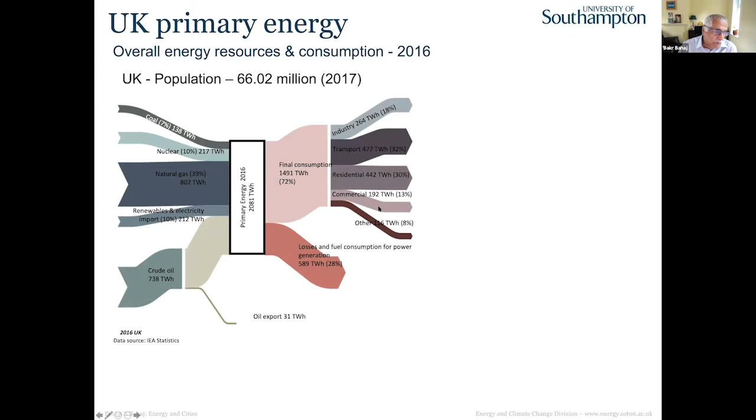So looking at the UK as a whole in terms of primary energy, this is the chart that people show. This is for 2016; I have not updated it. It indicates where the inputs are and where the outputs are. You can see the final consumption, and this is how much we waste, about 28%, and this is the input from renewables. And if you look at what's happening to the grid now, this is the 24th of May. You can see that the top producer of electricity in May is wind energy. And in selective areas, even solar is producing a lot of electricity for us.

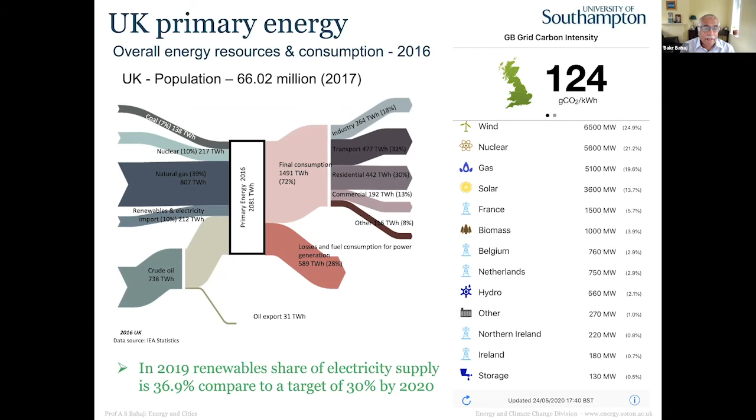And you can see by 2019, about 37% of our electricity was produced from renewables, really beating the target of 30% by 2020. So we're doing quite a lot in relation to energy generation and making it through renewables. But we're not doing very much in relation to buildings.

So in terms of international targets, this is what the Climate Change Act did in 2008, far beyond anybody now thinking about the Paris Agreement. 2008, a long time ago: 80% reduction from 1990 by 2050. And I'll talk about how this is going to be achieved. This is the Climate Change Committee, and these are done in terms of carbon budgets. You can see that in the last carbon budget, agreed in 2016, emissions will be reduced by 57%. So this is really what's happening in relation to the Climate Change Act. And then we got the Paris Accord, which I'll possibly talk about in a minute.

So what does that mean? It means that by 2030, we need about 150 terawatt hours of electricity coming from low carbon. The government indicates this will come from about 50 gigawatts, basically from wind, solar PV, and perhaps marine energy, which I'm also an active researcher in. So if you put on top of that the Paris Accord, 1.5 degrees centigrade, there are huge things to be achieved in the next 30 years.

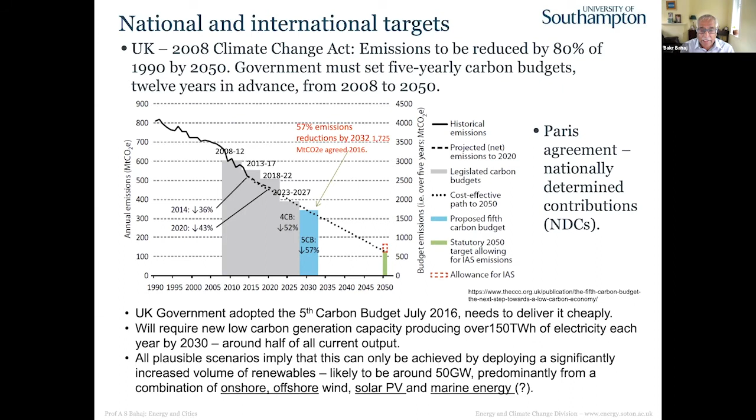So in 2019 we also changed the whole game for everybody else around the world. The UK is the first of the G7 nations to actually say we're going to be net zero by 2050. And that has a lot of implications for how we live, how we communicate, and how we travel. It means that this curve here, rather than 80%, will go to about zero.

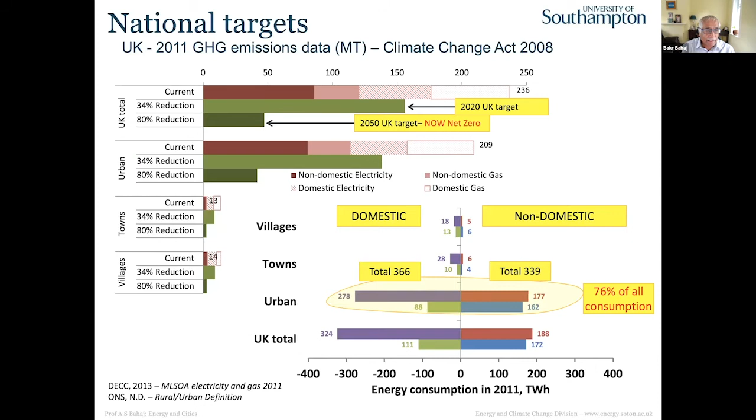So here are the targets again, basically net zero by 2050. So where is the consumption? This is the work that we've done in relation to where consumptions are around in the UK. If you're looking at both domestic and non-domestic buildings, cities rather, you can see that about 76% of that consumption is falling in the urban environment. And this is where we really need to get the action happening. And that's why we have the NetZero Collective taking that as a torch to go ahead with it.

So cities and energy are really quite interlinked. Cities are occupying a very small amount of the land surface in the world, about 2%, but they account for half the population, which will be about 60% by 2050. Two thirds of the energy, or more in fact, is consumed in cities, and 76% of the emissions is done in cities. So cities are really critical in delivery of our targets.

Also, cities are important because they can provide leadership at the national, regional and international levels to allow us to achieve the targets. And then there is also the wealth within those cities, the innovations through universities and colleges and so forth. And also there is large-scale infrastructure, for example buildings, where you could deploy systems at scale. So that's really the pinning point for why I think we need to look at buildings and also cities.

So based on that, we have done a lot of work in relation to our buildings. If you look at a building, this is a typical semi-detached or detached building. You can have a lot of aspects of how you can provide energy for it. You can have a wind turbine if the resource is high, you can have PV, you can have ground source or air source heat pumps. And this was done 13 years ago, so we've done all the work around this.

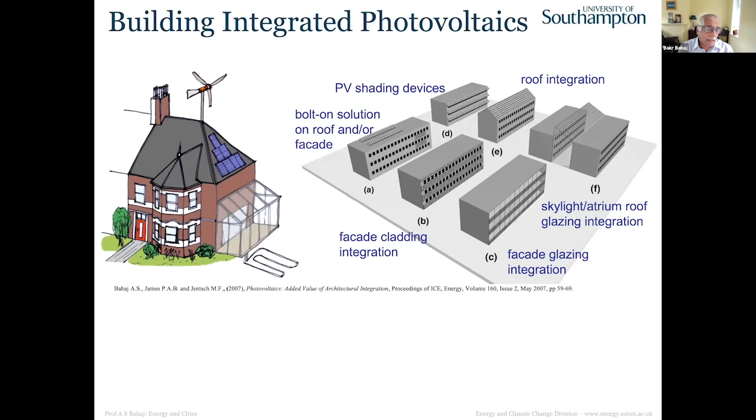And also for larger scale buildings, you can integrate photovoltaics either on the roof or as bolt-on systems, in skylights or atria and so forth. This is something photovoltaics can afford to do because they're modular and can be integrated in facades of buildings. That's only for power generation, but you can think about heat as well, not from PV but from other technologies. And these are examples of the buildings that we have in Southampton.

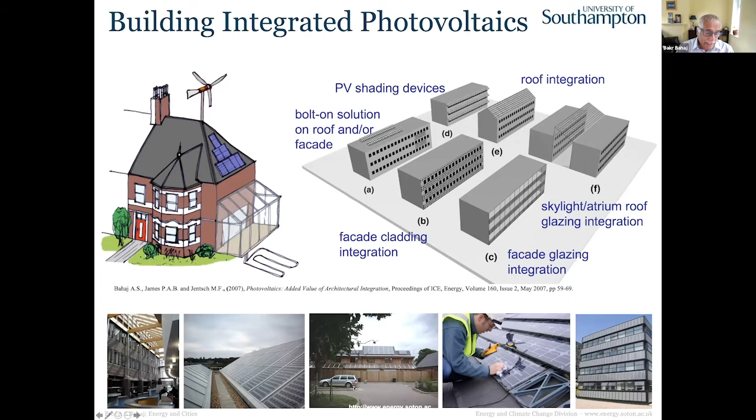So if you happen to be in Southampton, please have a look around our buildings. This is something that we have delivered, piloted and produced as a tile in here. But this building here, I will talk about right at the end. So what we have done is we mapped all the buildings in Southampton, both industrial and domestic, looking at the orientation and the areas of the roofs, to understand how much power we can produce from these buildings.

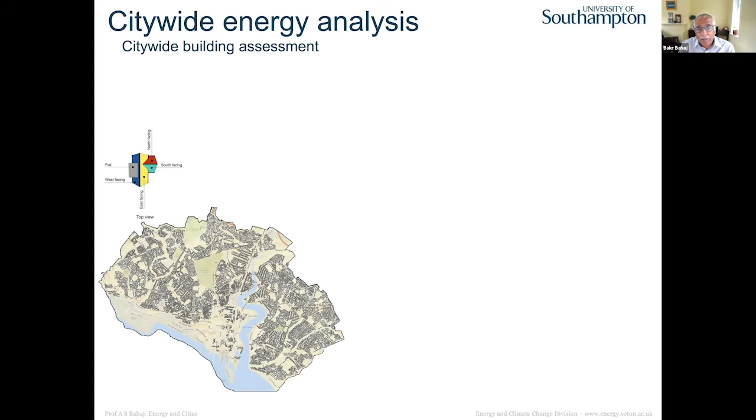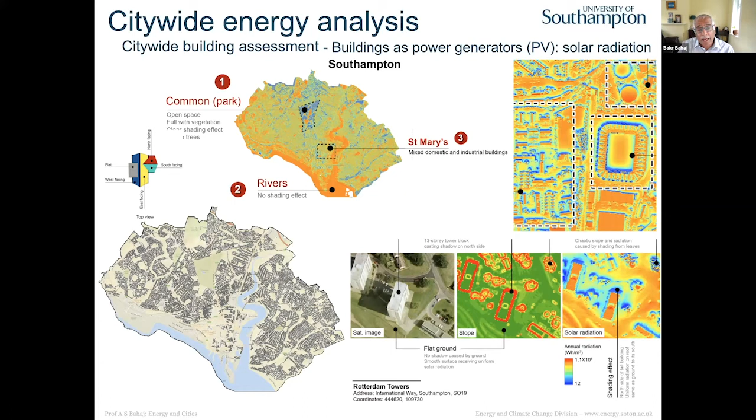So what did that tell us in terms of having electricity in cities at scale? Here are the results. As you know, buildings have smaller roofs and larger roofs, so we have to quantify the sizes of the roofs. For example, smaller buildings will have smaller scale PV, 3 kilowatts or less, and the domestic are the majority, non-domestic the minority. At the large scale, it's the non-domestic, where you have quite a lot of available area to do PV.

What's interesting is how much energy that is producing. The modeling says that Southampton will give you about 260 megawatts of PV available for the whole year, of course not continuously, but varying with the sunlight. And the amount of energy this could produce is about 247 gigawatt hours. So when I did the presentation for the council, I showed them that you can actually have about 25% over the year coming out from the roofs of buildings.

And they really got interested in this, and they tried to have a program on that. And actually they are still progressing with it, but at a larger scale. So you can see cities can actually deliver some aspect of the power requirement through photovoltaics to start with. Obviously it is varying over the day and over the year.

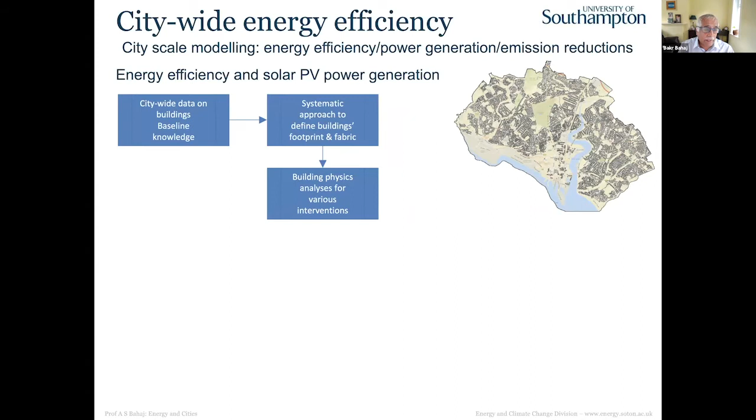And then if you have already defined the buildings in the city, you can do other stuff with it. You can do, for example, interventions like roof insulation, floor insulation, window upgrade, wall insulation, and so forth. And you can do the analysis, which is validated, to allow you to indicate how much the hard interventions can give you in terms of energy saving and emissions. So this is technology; hard interventions give you that.

You can look also at well-being, behavior, attitudes, and acceptability, also cost, economics, and that gives you an indication of what the soft measures could also produce in terms of reduction in emissions from the city. And also you can have an implemented environmental policy or a driver. For example, Southampton City now got the Green City Charter, which we are working on with them, and that will give you another indication of what the policy implications could produce for you. So that gives you an indication from a whole city, but based on a square meter of a building, to allow you to do the modeling and come up with some results.

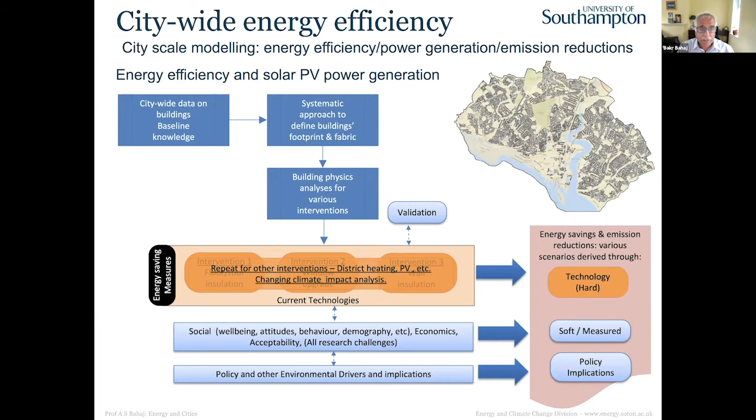A couple of minutes, please.

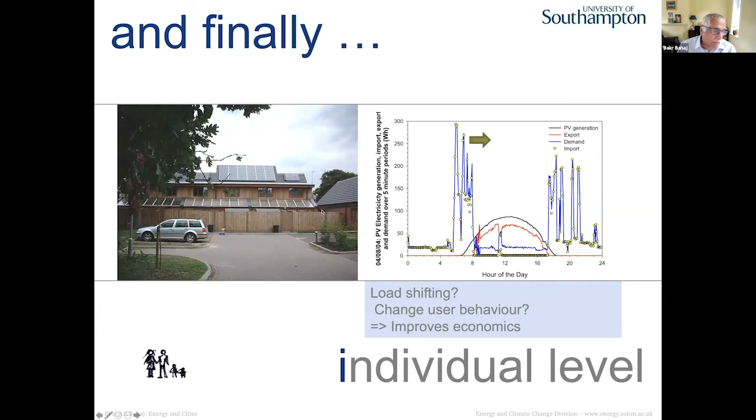So here is what the photovoltaics produce in terms of electricity. And this is what we export to the grid. You can see most of it is exported to the grid, where the consumption profile is here. So if we shift that consumption profile into the middle by behavior change, you can see that this householder could reduce quite a lot of their energy.

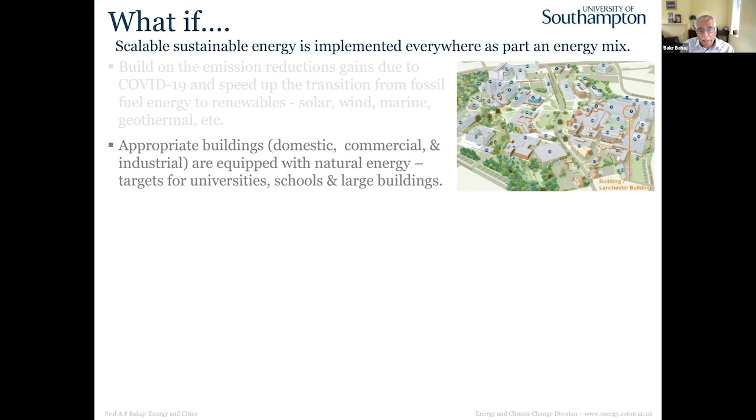So I'll finish by asking a few questions. So what if scalable, sustainable energy systems are implemented everywhere and become part of the energy mix in cities? So we can build on the COVID-19 reductions and so forth by transitioning ourselves from fossil fuels to renewables. And if you look at our campus here, we're looking at that now in real terms. How can we reduce the footprint of the university? So we're looking at each and every building. We can look at that in terms of integrated PV as well as district heating and so forth around universities, schools and citywide.

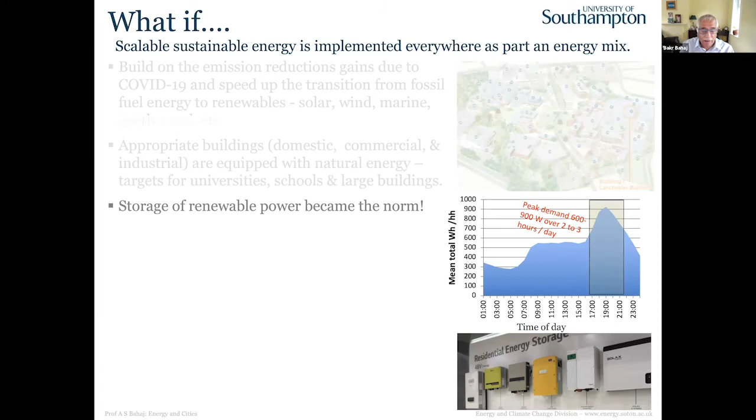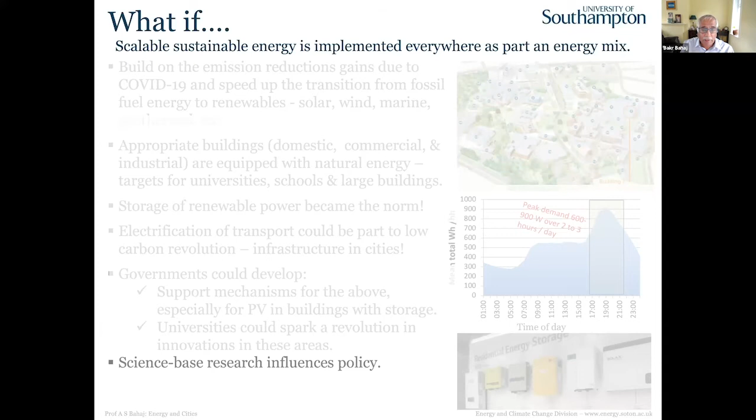Good. You think about the electrification of transportation and so forth, and we need to think about how the government could allow us to develop this by having mechanisms to support this, and the universities could be the spark for that, and the science base perhaps could be the people who actually provide the evidence, as Alan said, to influence policy. So we should really work together to make it all happen. Thank you very much.